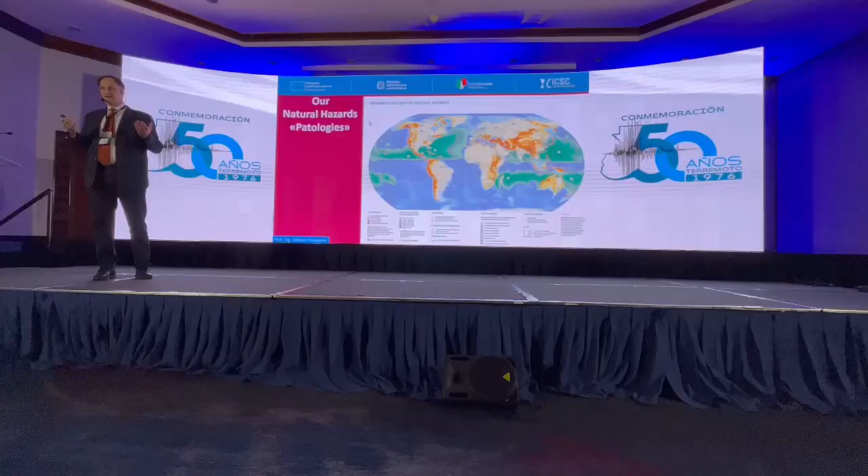No formulas. The point is, remind everyone that we have a number of pathologies. And it's important to communicate to the public using the medical engineering metaphor, the comparison. We, as a medical doctor, need to understand the problem, the pathologies.

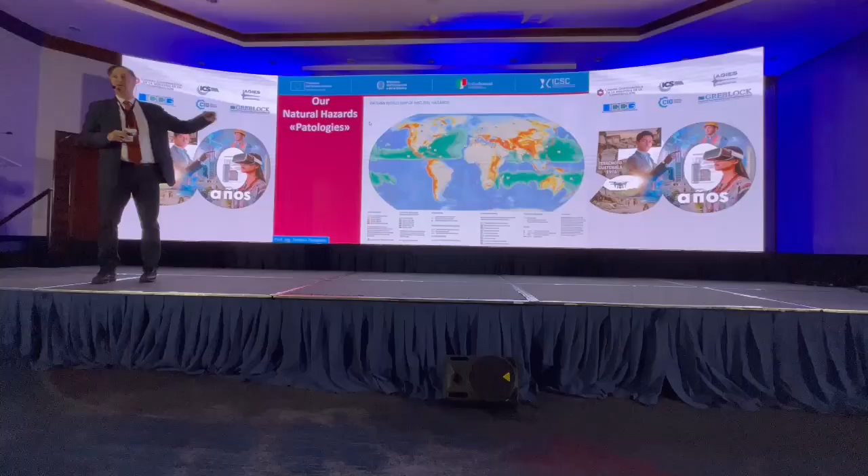You are in one of the regions where basically you have everything: volcanoes, earthquakes, floods, cyclones. In Italy we have volcanoes, earthquakes, floods, cyclones. We don't have a lot of cyclones, but we are getting quite severe weather conditions. So what are we doing with these pathologies?

Well, we have to understand that, as already mentioned, in modern societies in 2025, obviously we need to save lives, but it's not enough. The experience that we had in the latest earthquakes is that saving life is absolutely fundamental, but it's not sufficient. Because saving lives under major disaster will, on one hand, be the primary goal, but on the other, will not give to the society what we call resilience.

In a nutshell, I went through the earthquake in New Zealand. I was a technical person, I was a father. And the worst case scenario is when you know what's happening and you can't do anything about it. So you're entering a building in an aftershock and you don't know if you're getting out of that. And people saying, why are you doing that? Because that's our job. But you have kids. Yeah, but that's my job.

So once you go through an earthquake and you survive, as I was lucky to, then your brain is changing. And your brain is changing so much that you don't want anymore to talk to engineers only, architects only, constructors only, but you want to talk to the politicians. You want to talk to the decision makers. So, hands up, how many of you are engineers?

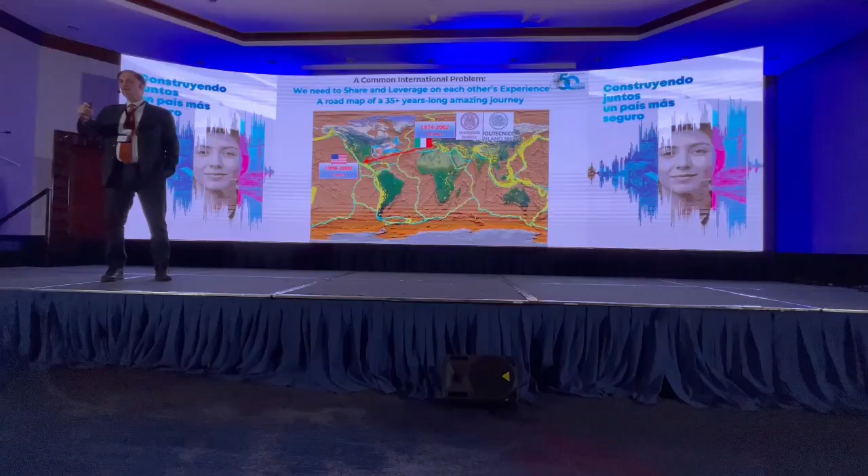Pavia University, working with the Leaning Tower of Pisa, with Professor Magenes, working on masonry, working on concrete, Technical University of Milan, then flying to San Diego, where I met Nigel Priestley, who became my co-supervisor. Thank you to Professor Rolando Torres from Guatemala University, where are you? Because he gave a fantastic history of Park and Paulay and Priestley and Housner and so forth, and Bill Robinson and Ivan Skinner and James Kelly, and the more you know.

So I learned my roles over there, and I will share that experience of what I learned. Then we come back to Italy for another couple of years, and we are actually implementing things that we've been learning from Italy and then from San Diego.

They're not happy because you want to travel the world. I ended up for 3 months for a visiting experience, a visiting lecturer in University of Canterbury, New Zealand, the Park and Paulay and Priestley, the land in the middle of Down Under, where they developed the capacity design. So weak columns becoming strong columns, and the beams becoming weak beams. So you want to have the damage where you think it's supposed to be.

And I spent 16 years over there. The 3 months became 16. Then I came back. Came back doing what? Came back to the capital of Italy, Rome, with the expectation that if you're in the capital, you will be able to speak to the decision makers, the ones that are going to make a change.

No, you need to chase them. They're not coming to you. Why they should be coming to you? Because in New Zealand, the politicians were coming to university to learn what was happening, to prepare laws to make it happen. So another world.

So I thought that Italy had developed the same culture in the meantime. Not exactly. So all of this, if you sum them up, is actually more than my age.

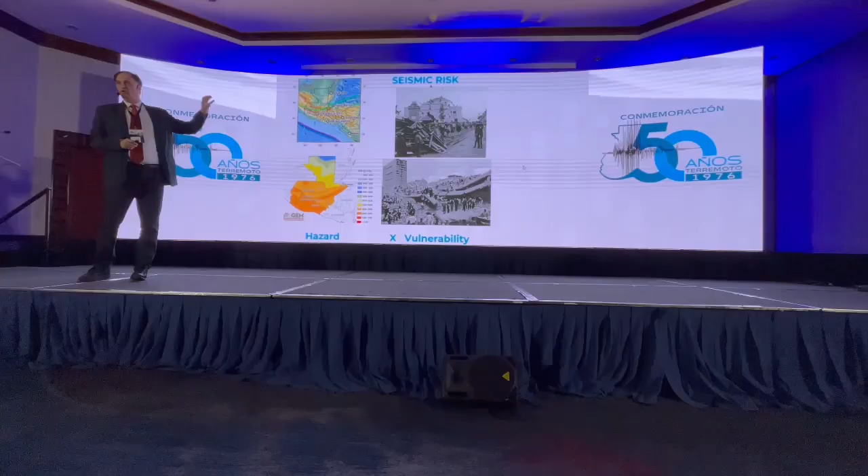It's nothing new. But it's not because Guatemala people were doing wrongly the design. It's because the knowledge 50 years ago, 70 years ago, 100 years ago was equally bad everywhere around the world. So the type of old buildings everywhere around the world were collapsing and would collapse if we do nothing, because that's what human beings knew how to construct.

Exposure has been mentioned. What does it mean, exposure? If the building collapses and there's no one inside, you're destroying the building, dot. But in reality, you're potentially killing people, you're potentially killing the production, so the contents, and you're potentially destroying the culture. So if you want to put money...

Often it's difficult to put money on the culture, although you understand it is very precious. If you want to put money, you will understand that production is important, but typically the idea is it's a private issue. Production is private.

So I will let the private company make an insurance. If the production is not working, I, a normal citizen, will pay more money. Your salary is not increasing, so you will be suffering the consequence of an earthquake far away in your same country because the whole country is becoming poorer.

Okay, what is the seismic risk profile of Guatemala? How many people know about that? Hands up.

Imagine you are in the construction environment. Your friends, when you go for an aperitif on Friday or Saturday evening, they would not know, they would not even care. Actually, they don't like to speak about bad things. So let's try to speak about good things.

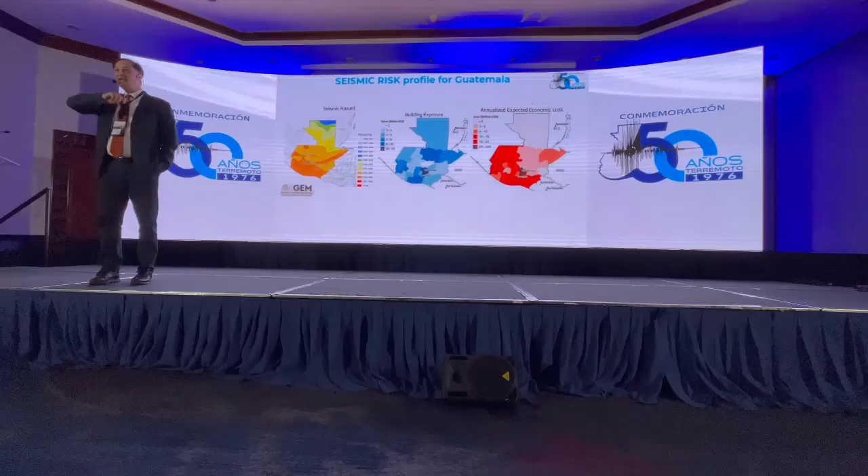Do you have an energy bill? Every month you're spending for energy? We are having a seismic bill, that's how I call it, that we, all together, citizens of the same country, are paying without knowing. If you knew how many millions of US dollars every year, by doing what? Nothing. You're doing nothing. There's a leakage of your money. By doing nothing, you're keeping spending money. Did you know about that? No. Why? Because no one explained that on television.

You need to be fair enough before the most important sports show that you have, explain, these are the civil protection uniforms, aren't they? You are from the civil protection? Voi siete della protezione civile? Gracias, muchas gracias por being here.

So the idea is that if we knew, and we told the citizens, that you're spending a lot of money, which is the reason your salary is so low and not increasing, by doing nothing, then I would say, listen, how much does it cost to spend less? It's called therapy. If you tell me how much it costs, depending on how much I can invest, I will try to reduce the annual seismic bill in Guatemala, in Italy, in New Zealand. But I need to show people, otherwise they will not understand what we're doing.

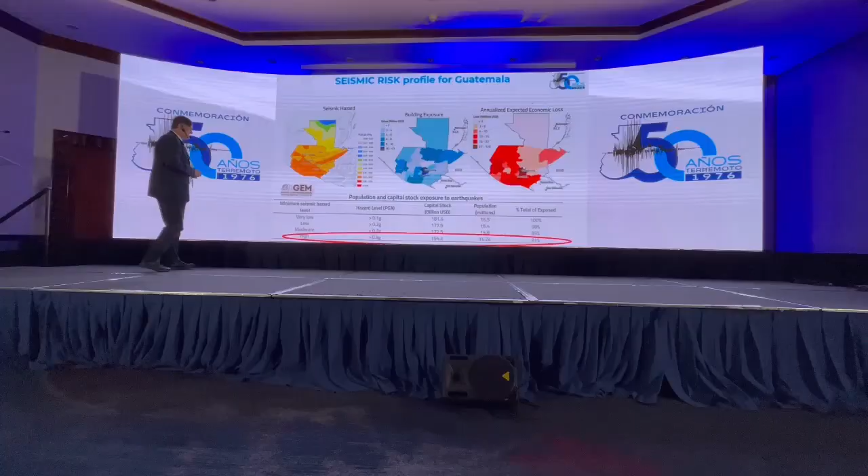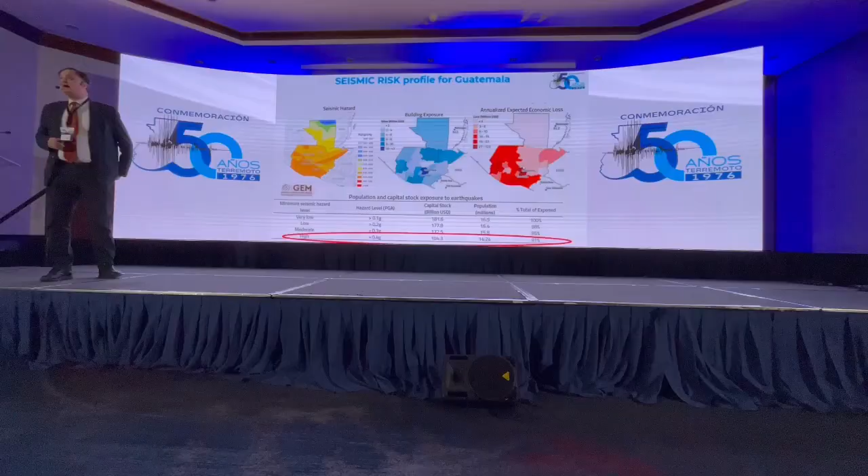Just look at the numbers. Hazard level, capital stock, population: 14 million people, 90% of the population in Guatemala is in a high seismic region. 90% of the building stock is affected, socially and economically, by whatever will happen. What about the other 10%? They will be affected too, because if Guatemala City gets in trouble, the whole country will get in trouble because of the numbers.

Okay, so let me open up a big question. How do codes design buildings? New. Today I designed a new building, and it was already mentioned by a speaker, so I'm very pleased that we are integrating. How is a newly designed building performing? We go to New Zealand.

We go to New Zealand where we had a reality check. It's called the Shaky Islands. We are really in a very high seismic region. The city of Christchurch, where the University of Canterbury is, had a peak ground acceleration, the intensity of the 'flu' so to speak, not too high, 0.22, written in the code.

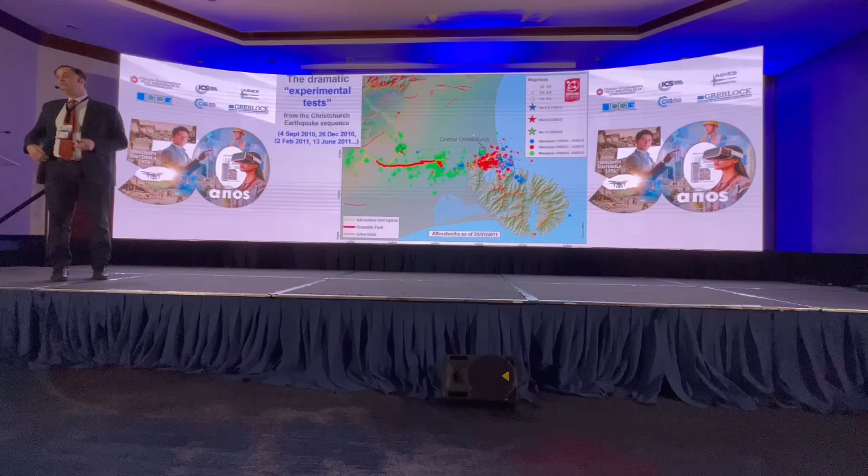So what we got in New Zealand has been a breakthrough in the understanding of earthquake risk, because it's a very well-developed country, a country with awareness, a country with good construction. It's a recent country, you don't have buildings thousands of years old like in Italy, you have buildings 150 years old. So relatively new construction, well designed, well aware of people.

A sequence of 2 years of aftershocks, and the city falls. There is a documentary on the internet called When a City Falls. These are not clouds, it's actually the debris of an explosion within the central business district. You didn't know. You heard about it, but you didn't really know. That was my city, I was living there with 2 young kids.

So we started looking at what we unfortunately have to expect, even in New Zealand, where capacity design was developed, where big columns and small beams to create a plastic hinge in the beams were developed. Prior to the invention of capacity design, the buildings are equally vulnerable.

Look at those buildings, small columns and big beams. How is the small columns, big beams going to fall? You don't need to be an engineer, an architect, a

geologist, a contractor, or an insurer, you can be a kid. You show a kid at school, what is this type of palafitta? I don't know if palafitta is understandable. Palafitta, how is a palafitta failing? I'm asking primary school kids, and the best answer I got is, as a palafitta, so of course it's going to break the legs.

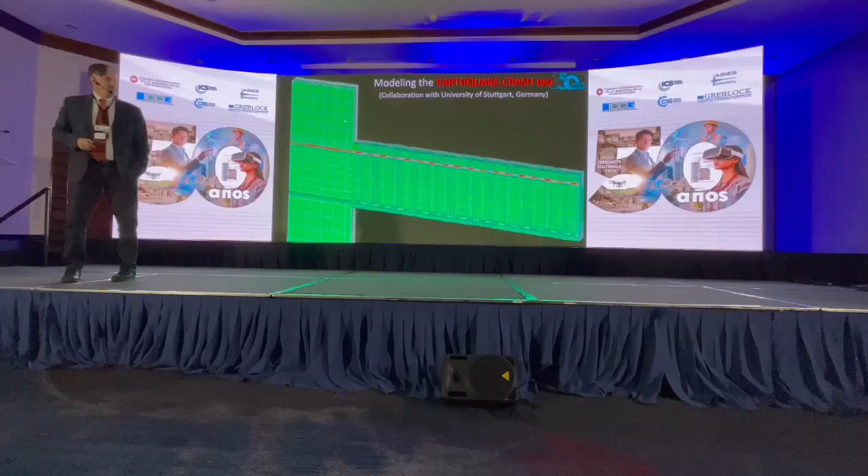And the Parliament and Senator people said, we didn't know. Now that you do know, what are you going to do about that? I'm expecting tonight on television, after the TG1 news, I'm going to expect you to say, oops, we didn't know, but now that we do know, repairing this building is extremely expensive, but we know how to model it. So from a scientific point of view, wow, look at that fence, isn't it?

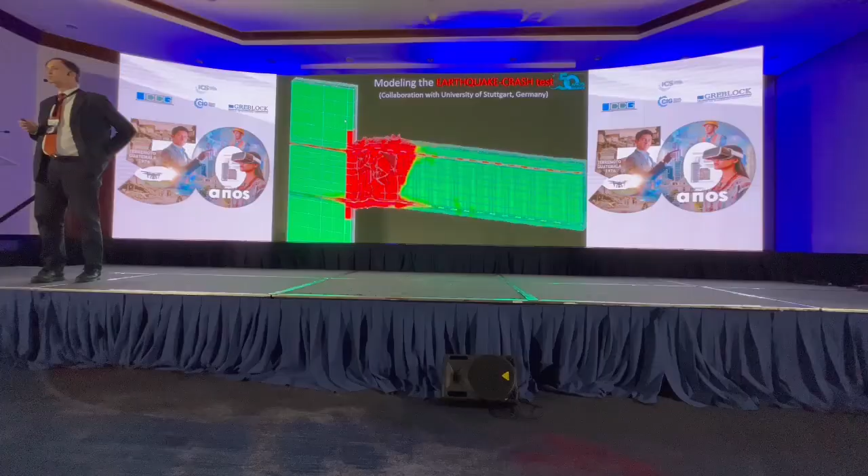This is called a digital twin. We were doing numerical modeling since ages, there was no need to call it digital twin. But digital twin is cool, it's fashionable, right? So this is a digital twin of your building.

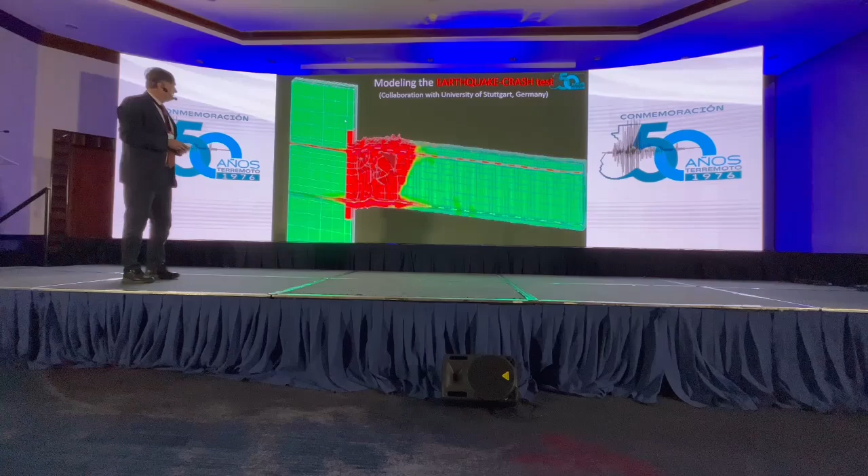This is exactly what is going to happen into your beautiful living room. So you're in the living room, and there's going to be something like that. And as a consequence, we actually don't really know how to repair it. And half of 1,800 buildings in the central business district in New Zealand were demolished.

Because repairing those buildings is a disaster, it's very expensive. But while you're demolishing it, you're saying, but these are by code, this is new design by code. So there's something that we have been missing. The consequence of that, we do it again. Just point your eyes to 2 or 3 buildings, look at them, fix them, okay?

Fantastic, I didn't know about that. So now that I know, I will start thinking about it, because in addition to 185 fatalities, the cost for the country was 40 billion New Zealand dollars - let's say 1-to-1 with the US dollar in terms of purchasing value. So the exchange rate is different, but basically it's like having 40 billion US dollars.

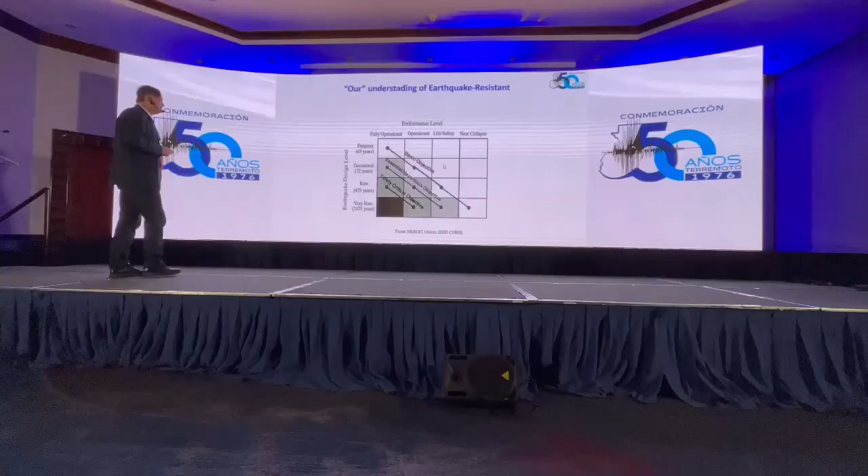So how can we rebuild a safer and resilient community? What happened in Christchurch is that after the earthquake, we started explaining to people the basics, as we already know - unfortunately, we already know. So we go back to the Vision 2000.

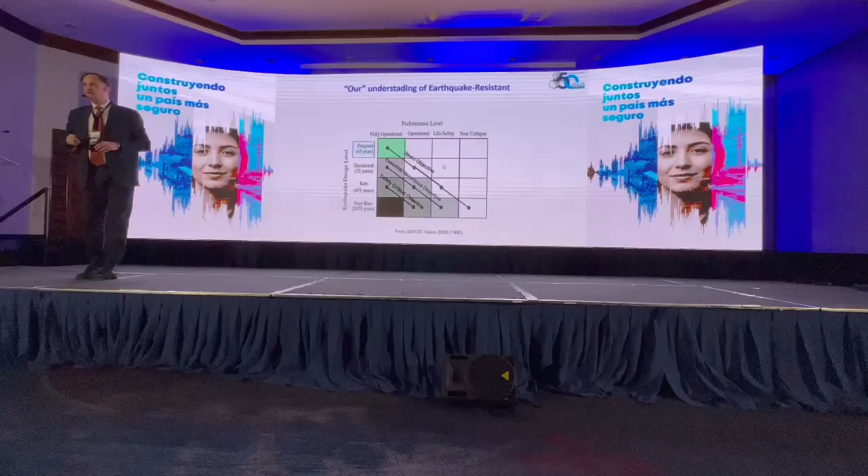You already have seen these matrices. You know that this is everywhere in the world: we are designing for small earthquake, small damage. Yellow, bigger earthquake, bigger damage. Orange, life safety - bigger earthquake by design, bigger damage.

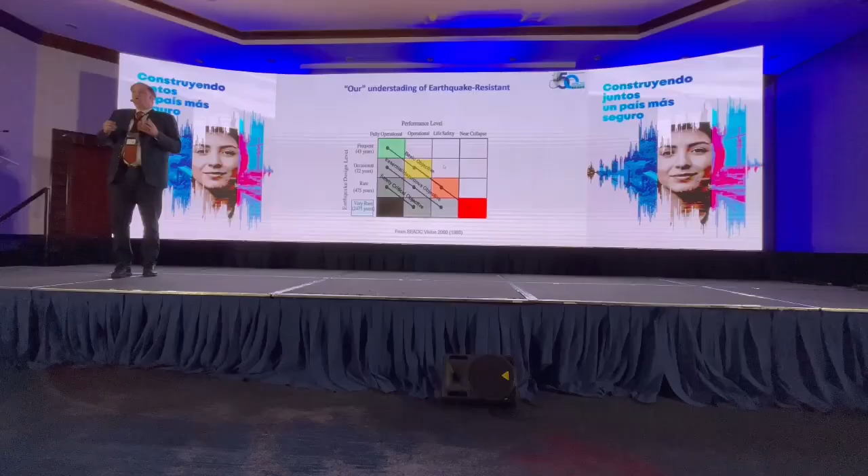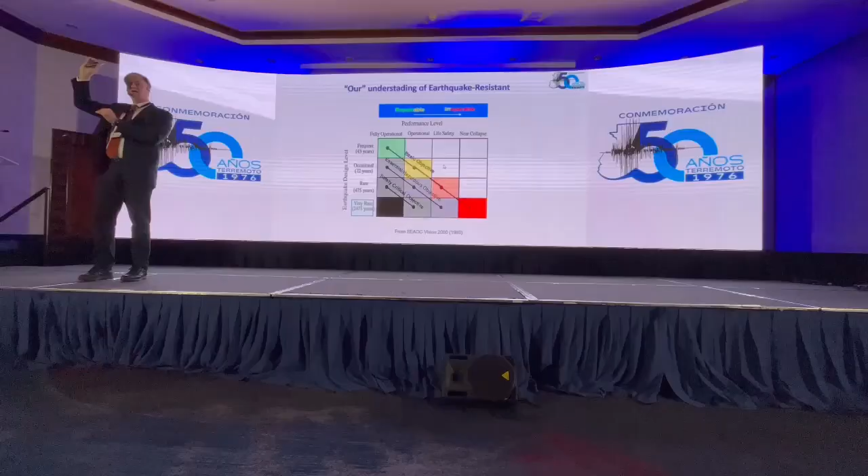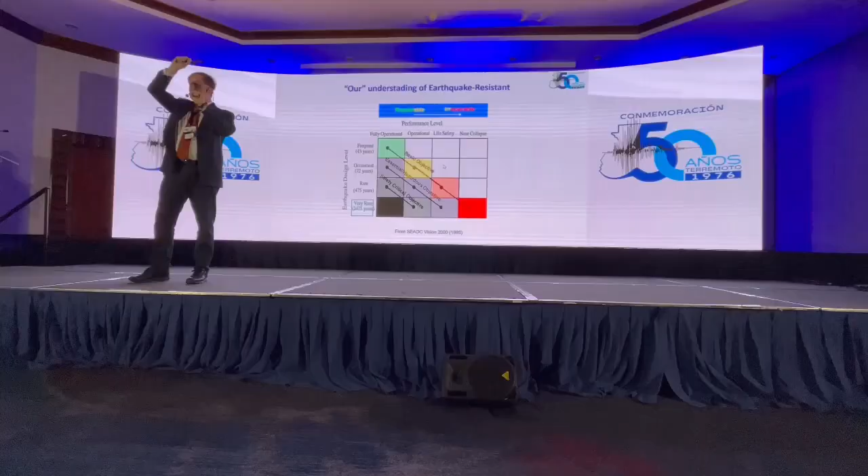So what are the colors that I added? The colors are what I added to explain to the New Zealand population what the consequence was. Those colors are called a tag. After you get an inspection of the building, you get a tag, you get a paper - you are allowed in, you're not allowed in, or absolutely you cannot touch this building, you have to demolish it. So people were very much understanding.

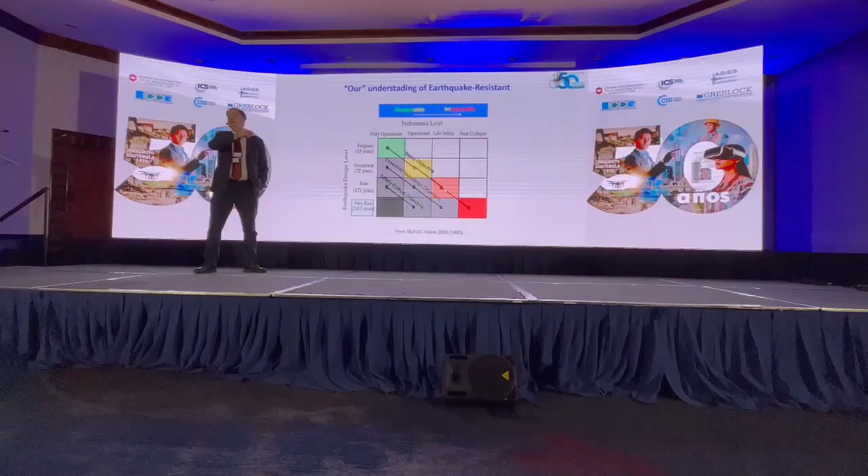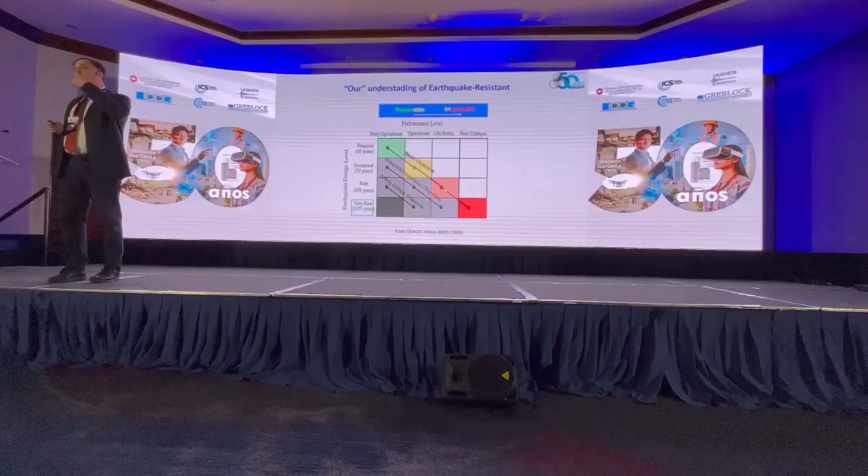And what are we designing for? We are designing for here, which is exactly what we saw - we are designing for life safety, the consequence of which we did not understand. We didn't know. After the Christchurch earthquake, which is now 15 years ago, we know that a full city will be destroyed because you're not able to repair it.

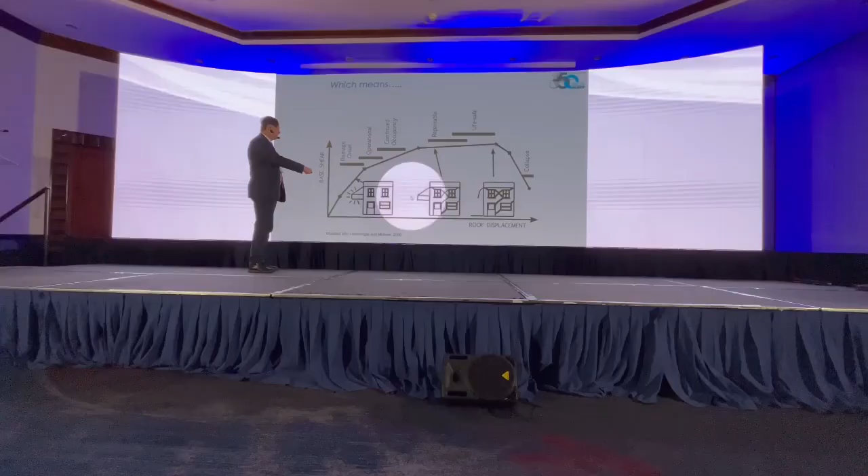And you know that. So imagine, I'm looking at the civil protection people - tonight you're going to talk to your friends, they should not be technical people, your friends. And you're going to say, I'm designing an anti-seismic building, an earthquake-resistant building. They would be thinking it's this one here, possibly in between here. They would never guess that your building is that one. They would never guess. But as soon as you mention that it's like a car, they will understand it.

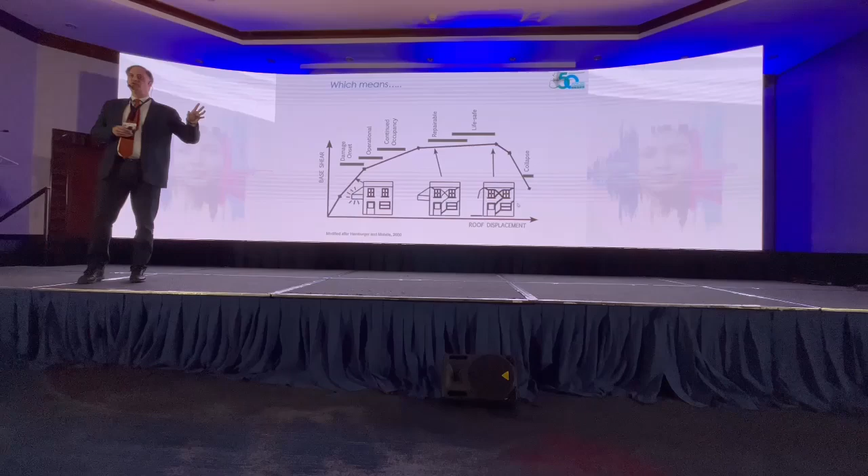It's a major difference. In a car, you get a crash test, you get an accident, you're going to have a new car in a few days. In a building, you're not going to have a new city for everyone for decades. So the impact is completely different. So let's make an example with a car, but let's remember it's different. Okay, so I'll go fast.

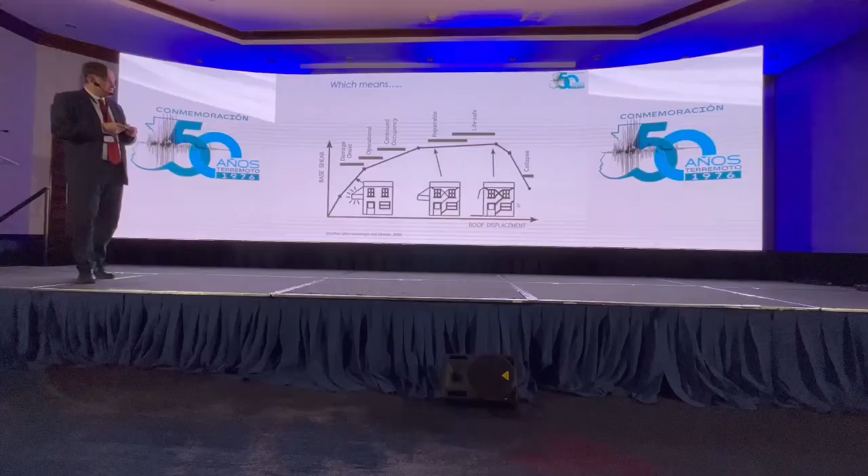The code is not meant to be the target. The code is meant to be a minimum by law. Yesterday we were exchanging some concepts, and I was saying that I tend to be very direct when I'm teaching. So to my engineering students, I say that the code, minimum by law, is what allows you not to go to jail. If you cannot go below that, it's minimum.

So if you do the minimum by law, are you doing good design? No, you're simply protected from going to jail. But why are we allowing that? Because no one really knows what we're doing. No one really cares until it happens, and then they're going to tell the engineers it was meant to be earthquake resistant. He said, yeah. And we are clarifying that earthquake resistant is not earthquake proof.

Earthquake proof for people means bulletproof. Shoot me, I'm earthquake proof. Shoot me, I will continue working the same day. People do not know that.

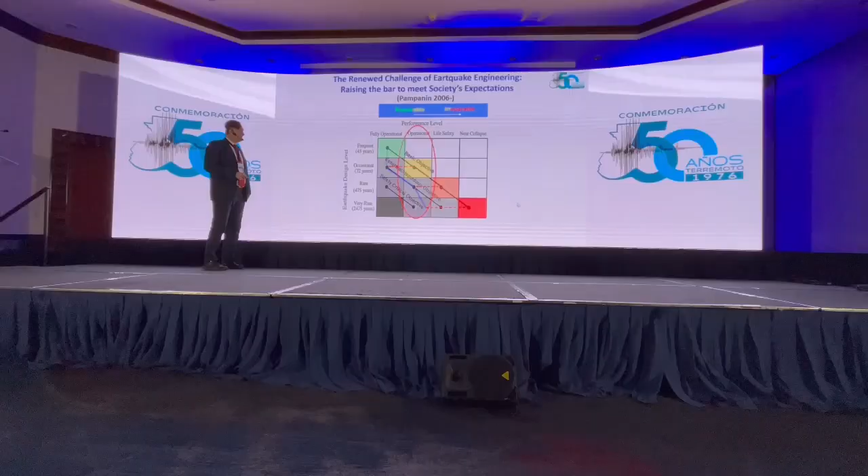As soon as you make it clear, we ask, so what should we be doing? We should simply raise the bar. We should design according to this performance approach, which means repairable. We need to make something more focused on damage control, which is repairable.

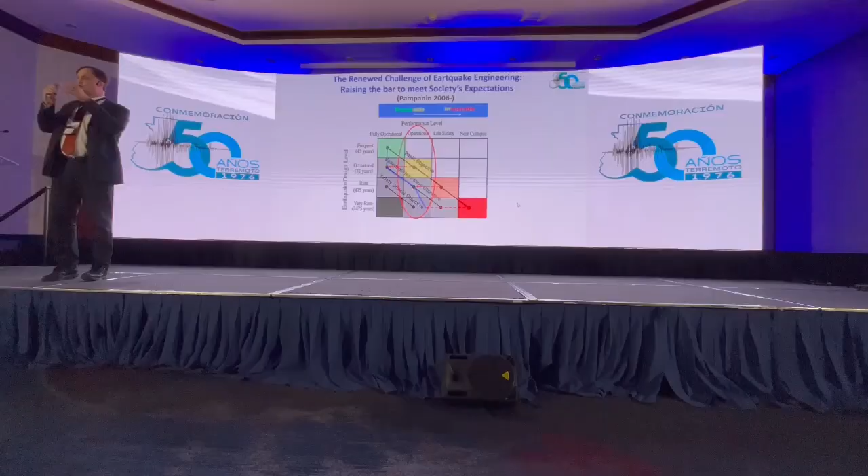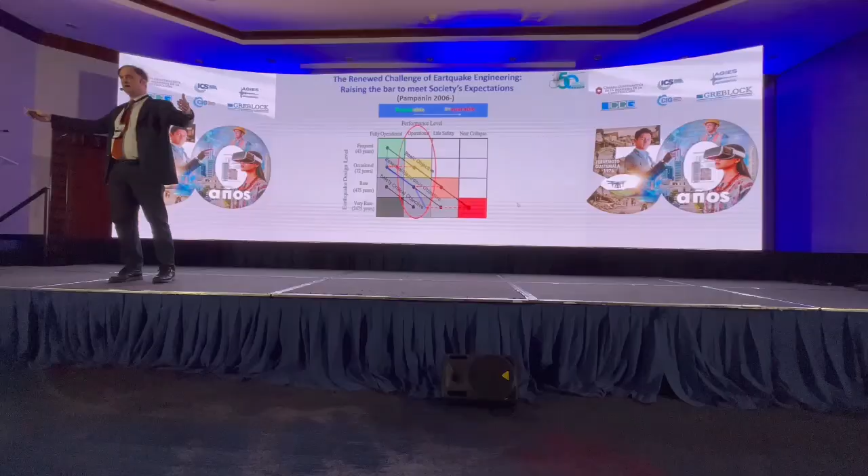How much does it take? You can design a bunker, a huge 1.5 meter thick wall for a nuclear bunker as your house, but it's going to be too expensive. Or you can change technology.

So there you are. These are supposed to be, as I see, the minimum by law in any country which is claiming to be not underdeveloped, you see what I mean. If you're not underdeveloped, then you need to either use base isolation, supplemental damping, bracing systems, dissipative devices, or let's check that out. That's what I want to talk to you about, because I assume you know about base isolation. So rocking is a sort of internal isolation. Where does it come from?

Fast and quick, thank you very much to, where is Rolando Torres. I'm going to show you the minimum by law in any country which claims to be developed. How many of you know about this? Just raise your hand. 1, 2, 3, 4, 5.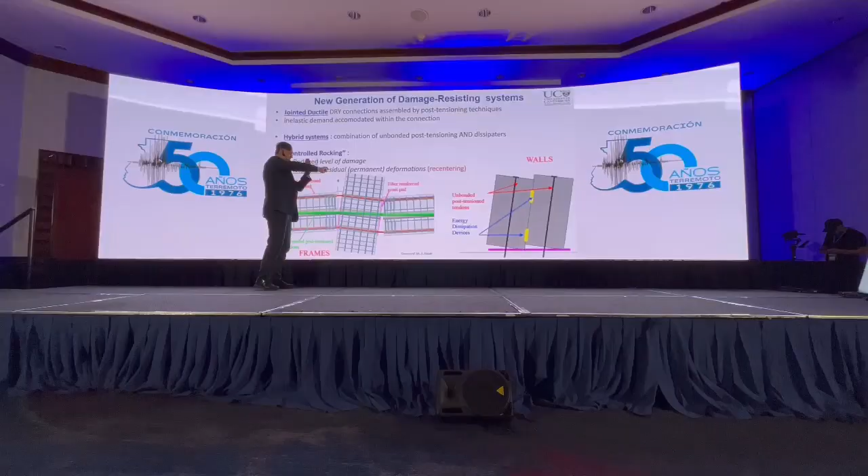And without going into the detailing, look at this, it was a monster test, the biggest large-scale test done in the United States at that time, 1999. So what is the idea? A Greek temple, rocking, being helped by a string, by an elastic rubber. It's not rubber, it's post-tensioning.

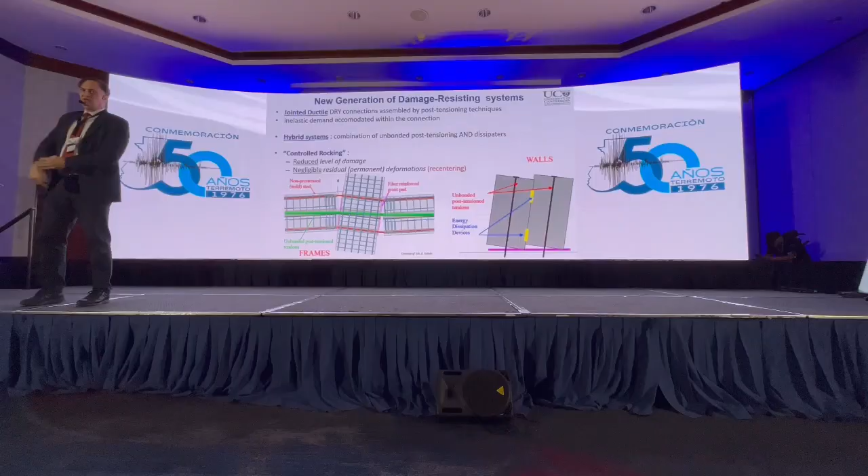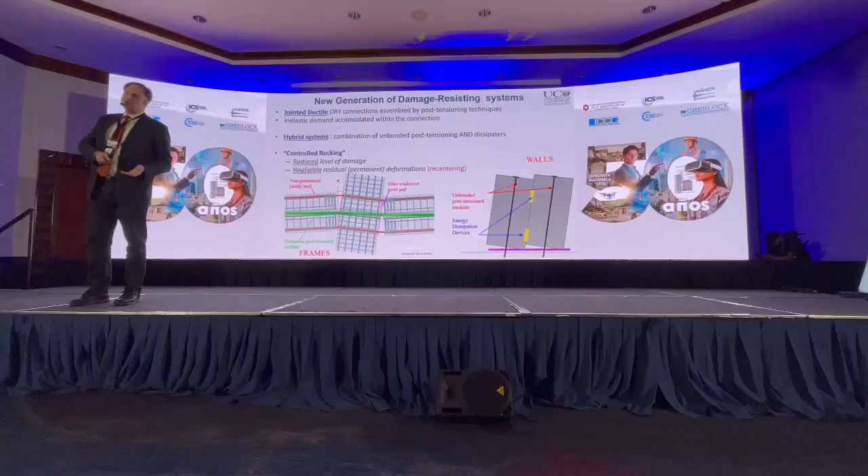So you have the Greek temple supported by, that's why we call it controlled rocking. Anyone who thinks to be competent, not in engineering only but in construction, can learn the basics. You need to learn something, the basics, to make this happen.

So you're going to find that there's a very young myself, Nigel Priestley, Sri Sritharan, and so forth. It was a big experimental test. And here I put this because there's now a video you can see on the news, sorry, on YouTube. So this link is for you to understand, but I'd like to present, there was a marvelous team.

Nigel Priestley, John Stanton from University of Washington, Seattle, Susan Nakaki, she was a designer in Los Angeles. Sri Sritharan, postdoc, associate professor, now full professor in Iowa. Christopher Latham, a PhD, a technician in the lab. He was the first student to complete a PhD degree with Frieder Seible. So the lab in San Diego had a technician with a PhD degree. Unbelievable. This young Italian who was climbing up, and a colleague, a master student.

Jim Collin. So beam, columns, walls, rocking, post-tensioning, you can do it tomorrow. So the challenge that we are having, and now I'm involving the architects, leader of the Cement and Concrete Association of Guatemala, we said it's going to happen because it's just a matter of developing new things. You can do it even using cast-in-situ concrete.

It's not as powerful, but it can be done. I recommend you go and buy this book. It's a commemoration of Nigel Priestley by his students, and like many of us around the world, we wanted to prepare a tribute to Nigel Priestley.

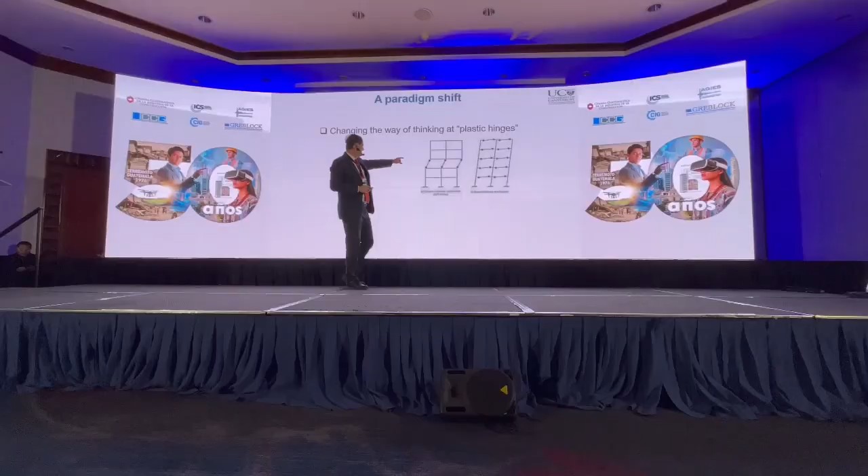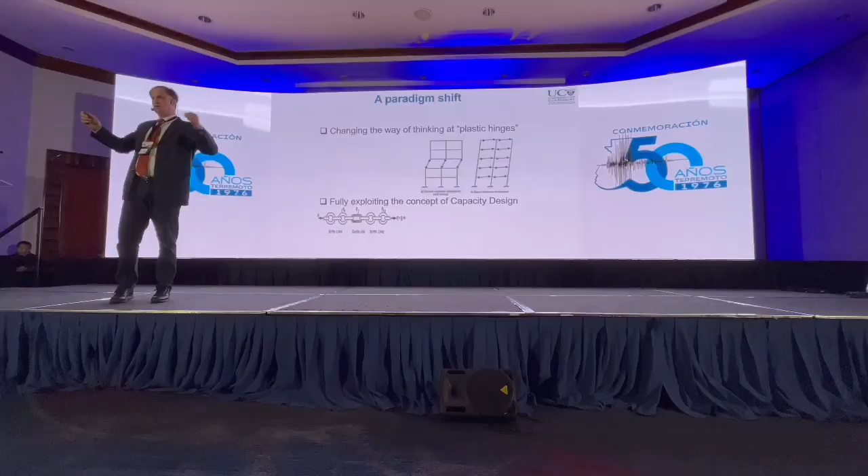So what is the new way of earthquake engineering? In the 1960s, the big breakthrough was not to have soft story anymore, but allowing the building to survive, to protect people, by making the columns, the legs, bigger. That was capacity design - the famous theory of the chain, Tom Paulay's theory. The weakest link of the chain is going to be the strength of the chain. If you make the weakest link ductile, you're going to have a ductile chain. But the ductility was coming with damage.

Now we're saying that ductility is not anymore equal to damage, because you have a different technology allowing you to be ductile without giving the same level of damage.

These are my students in New Zealand. We were doing laboratory teaching where they were constructing pre-70 beam column joints, pre-70 detailing, no stirrups in the joint - it's going to fail and kill. New code plastic hinge, and the students were constructing them to understand what was going on and testing.

And the new generation - we are in 2006 - an engineering student learning the ropes at university was never going to go back to that thing. He was saying, but that's easy. I can understand it, I can control it. By hand, in half a page, I can design it. So why should I use the old version?

We moved one step up - repairability of the link. And you might not know it, but we moved the bars outside. You see that the outside bar has a fuse. It's the seismic fuse. What is the seismic fuse?

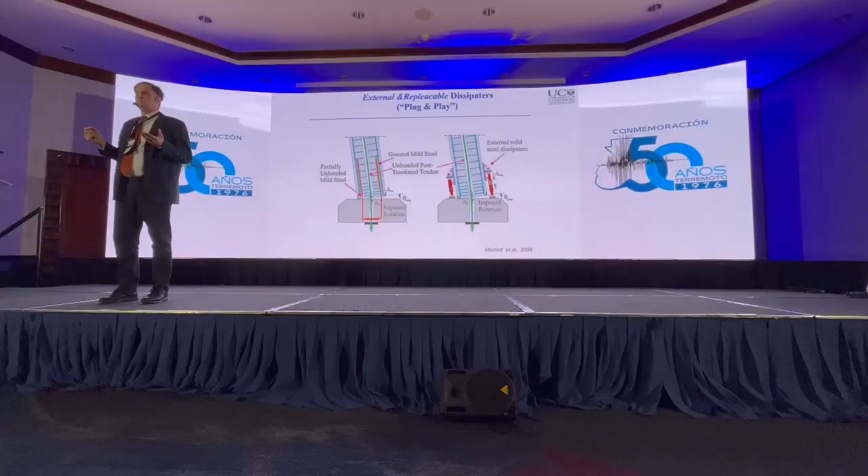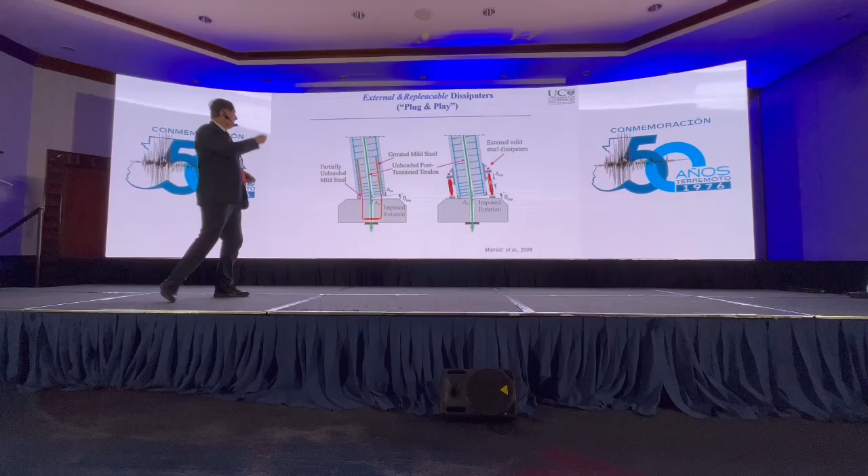You will be asked by your friends. It's the same thing as an electrical fuse. During a sparking electrical power, you're going to have some sacrificial elements, which is exactly what these guys are - these are sacrificial elements. I call them plug and play.

And the reason I'm extremely honored - it comes to my mind in a tiny way - and pleased to be able to speak to you, is because I decided to remain a poor academic. If I was patenting this solution, which I did not want to, I would not be here speaking with you. I would have 3 or 4 Greek islands which I would have bought with the patents, selling the patents. But I decided to leave it for free.

So, friends, colleagues, people, 15 euros. Why 15 euros? Because I didn't patent it. It's a piece of steel, fused down. I'll give you all the tricks of how to detail it.

One condition: my name is Stefano, your name is Ian - we have been given our name by our parents. So please don't change the name that I gave to this little technical device. Some people will say, why should I? Because commercially there are some people who are a little bit strange in the world who did it - just changed the name, pretending that they invented it, and this is extremely bad, extremely bad.

Where is Orlando? Orlando, next time you're making the slides: Priestley 1999 is low damage, Pampanin 2000-something, plug and play - but I don't care if it's Pampanin, plug and play, whatever, who cares about who did it, okay? The name is going to be respected.

So what does it look like? Really, we are playing with that - you can mill a reinforcing bar, then you're putting the bar into a tube, and you're grouting or putting epoxy, so you're able to go back and forth without breaking it. And that's an experiment, and that's a test.

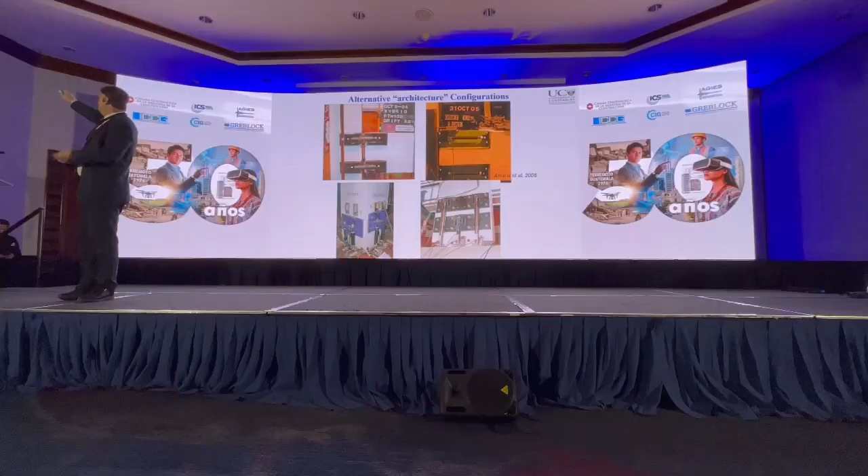Which type of new device do you have? You are at dinner with your friends and they are looking at their big column connection and they're saying, how did you get it? You know, it's the new PRESSS, iPhone 5.4, viscous damper, plug and play. How did you get it? I have good friends in Japan.

So it's not a joke. We said that to architects in New Zealand, they love it. The idea of expressing all of this, I will show you.

After an earthquake, you don't need to be an earthquake engineer to change this plug and play, like after whatever, you don't need to be an electrical engineer to go to the supermarket and change the light bulb. So in New Zealand they started talking about it. I'm Stefano, with the F, not Esteban. But the English would call it Stephano, PH. So Stefano will open a new shop, a seismic shop, located in the supermarket nearby the electrical plugs, and you're going to do the plug and play. So you're going to basically remove it and rechange it as you go.

Okay, fast and quick. You're going to say, can we design it? Of course, yes. FIB recommendation, 25 years ago, New Zealand Code, 2006. Bob Park and Paulay wanted to have that in the code, so I wrote with his help all the prescriptions, and then we prepared a design example because practicing engineers wanted to have an idea of how to do it.

How tall can you go? 39-story building in San Francisco. How's that? San Francisco, high seismic region.

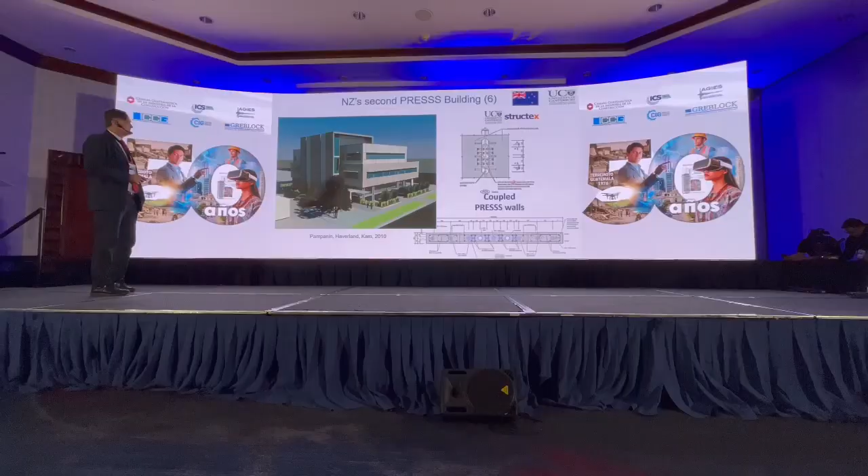It goes to different places, you can read about that in many magazines around the world talking about this. How does it work? Then we designed a hospital, which is not exactly a hospital, it's an endoscopy building in Christchurch.

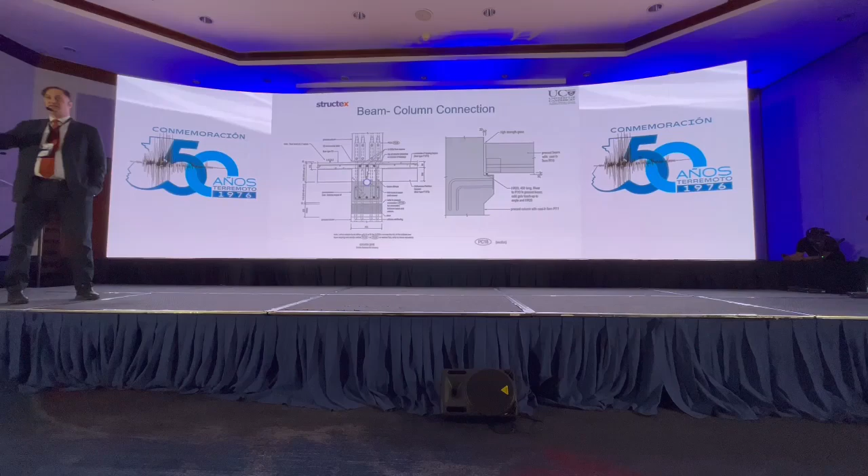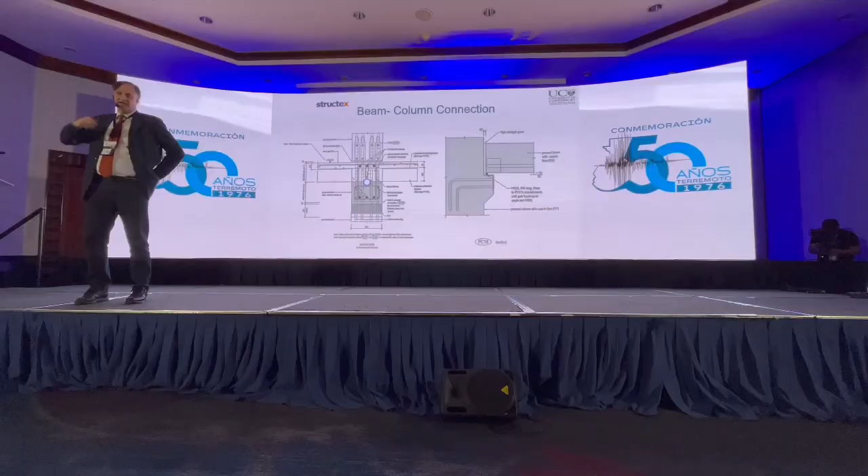I have a problem. Being an academic, I publish detailing, and people ask why I'm sharing my tricks. Because if I were commercially savvy, I would not be an academic. But since I am, I show all the tricks, so please take them for free and use them.

This is something you're doing. What is the difference? You just need a duct and post-tensioning. This building went through the earthquake in Christchurch and came out unscathed.

It went on the news. People were asking what this was, saying it should have cost a lot of money. So they came to interview me and others because they wanted to know how much it cost. I told them we saved a lot of money, but I had a confidentiality agreement, so I could not say how much we saved. Anyway, through television, people knew there was something different they could do.

More buildings followed, like the one we did in Rotorua, a police station. Look at this, it's beautiful. It's an importance level 4 police station, but they really wanted to see the dissipators. The architects in the corridor wanted to have many dissipators.

They said, listen, there's no need to have 7 or 5, we can use 2. But I like these dissipators, I was really joking. But do you think someone going to prison would be very interested to see your dissipators over there? Still, it was becoming fashion.

Vision 2050 of Christchurch. We started rebuilding Christchurch with all low damage technology, with humongous press and media communication about quake resistant design. You can do this in timber too, laminated timber. We developed and patented it, and again this is now allowed to be used. Post-tensioned timber, called Pres-Lam.

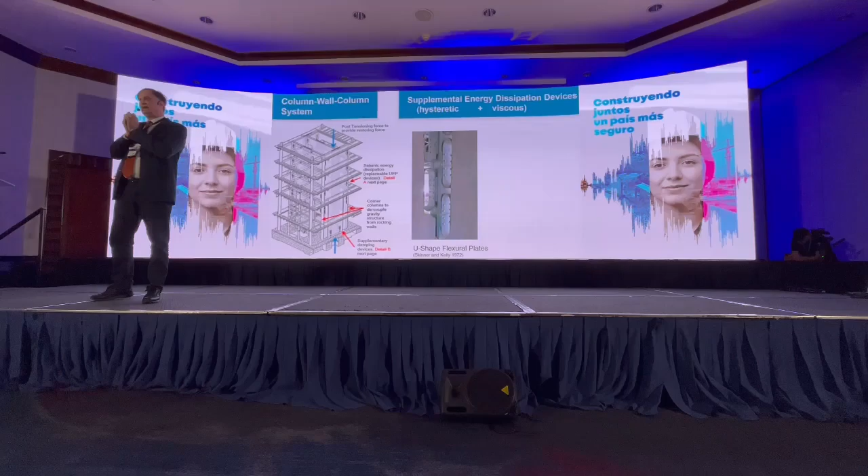James Kelly, Professor Kelly from Berkeley, took a boat and went to New Zealand for a sabbatical. He worked together with Ivan Skinner, who invented the U-shaped flexural plate. They worked together and wrote a publication together.

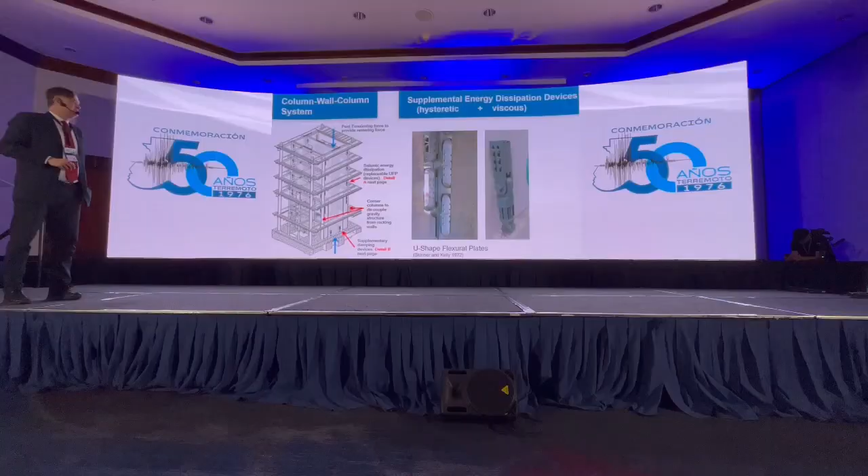So there's been a lot of important communication between the two countries. Let's look at what it looks like. The idea at the end was to have a single prefabricated element on site, tilted up, and this becomes something you can use anywhere in the world. You can then splice it or whatever.

I'll go fast to finish. You can use it for tall buildings. The FIB bulletin will tell you about tall buildings, and we had a seminar on it, again all material is free, use it, go and listen to it.

My speed of voice is a bit fast, so I'm the only one you should not multiply the speed by 2 when listening to, otherwise it would be impossible to understand.

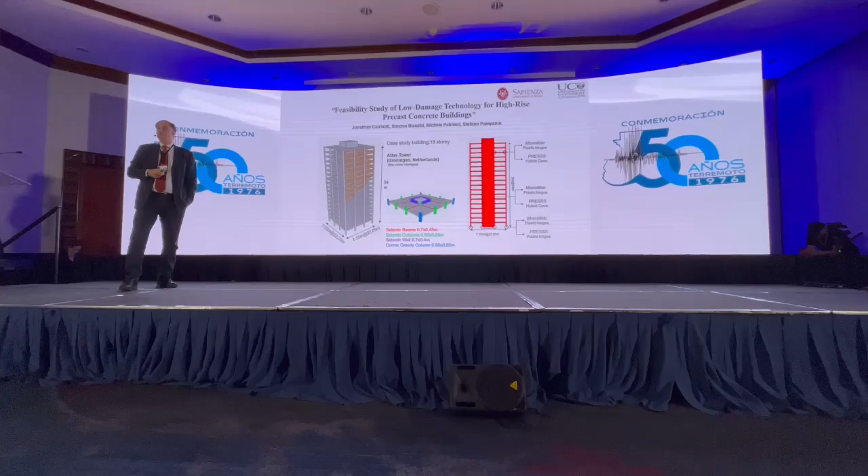But here we were talking about tall buildings. How tall? 25, 30, 35, 40, 45, 50. And the next step up, I want to address, the non-structural element, and I'm finishing because it took a lot of time. So what is the next level up that we developed and you need to know?

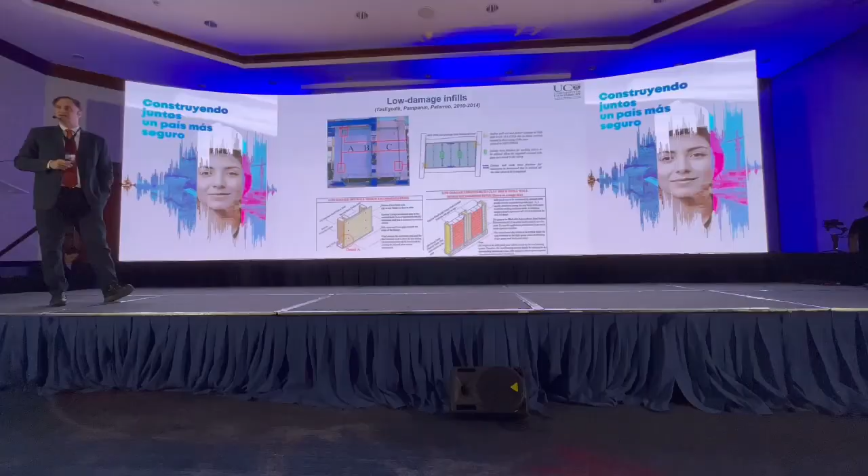Look at this, a shaking table test in New Zealand. On the skeleton, there is post-tensioning through, plug and play. So the plug and play is here.

Okay, I'm zooming in. Look at the Greek temple. The same plastic hinge, which would be forming cracks, now is summing all the cracks into one. There's nothing wrong breaking, and the plug and play are just doing their job.

So this costs nothing. Obviously there is more detailing. Here you would have a little bit of protection to the cover concrete. Why are we protecting the cover concrete?

Let me ask you, why did we ever accept cover concrete as structural engineers to be spoiled, to be pushed out? Because we did not have an alternative. Put a simple L-shaped steel bracket which will cost you €5 or less to make it happen.

So the more we go, the more we're preparing facades. These are heavy facades which typically are killing people. With a tiny detailing, they are moving like a skin around the skeleton. So a tiny detailing, and this is one example of it.

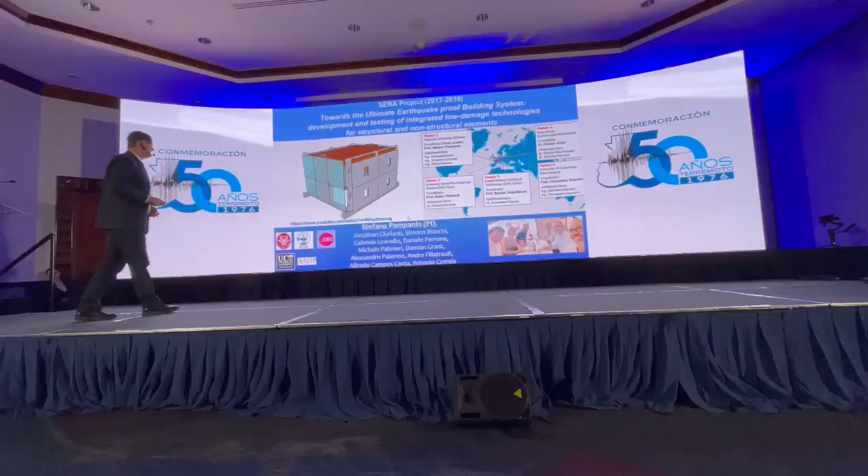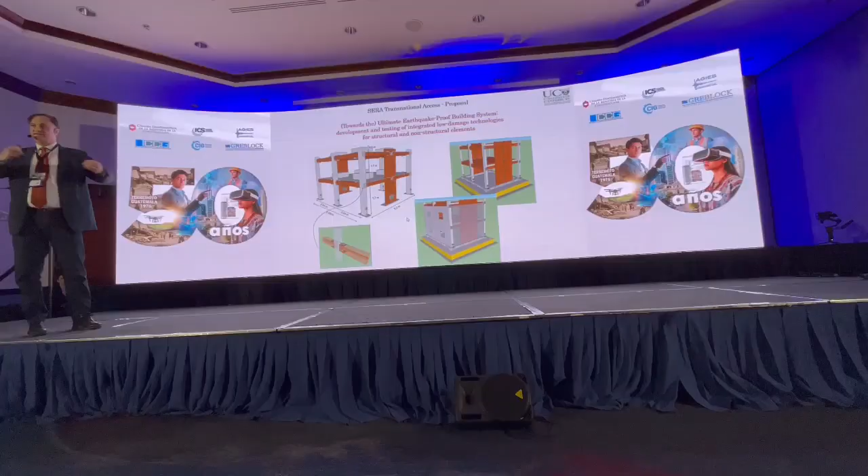And we are showing the shaking table. This earthquake is the Christchurch earthquake, which is supposed to be a collapse prevention earthquake, supposed to be taking down a new building. And just to not be happy with that, we were using the vertical acceleration from the L'Aquila 2009 earthquake. When you move a 3D shaking table in Lisbon like this, you have that option on, so I was playing with it to create a monster.

So we get, I need to click, and we're finishing. I need to click on the bottom.

So we are on this 3D shaking table with glass facades, precast concrete facades, clay brick infill, all detailed in a low damage way. So they are not standard, a tiny modification, the famous devil is in the detail. Supposed to be coming.

It's a collapse level of earthquake. There's nothing happening to the glass facade, there's nothing happening to the precast elements. If people can just slide fast on the bottom, just slide faster. Yeah, just go a little bit, yeah, thank you, there you are.

These are clay bricks, not constructed as we typically do, but constructed vertically like a gypsum rock. So with a tiny modification of detail, your house under a collapse prevention earthquake is unscathed.

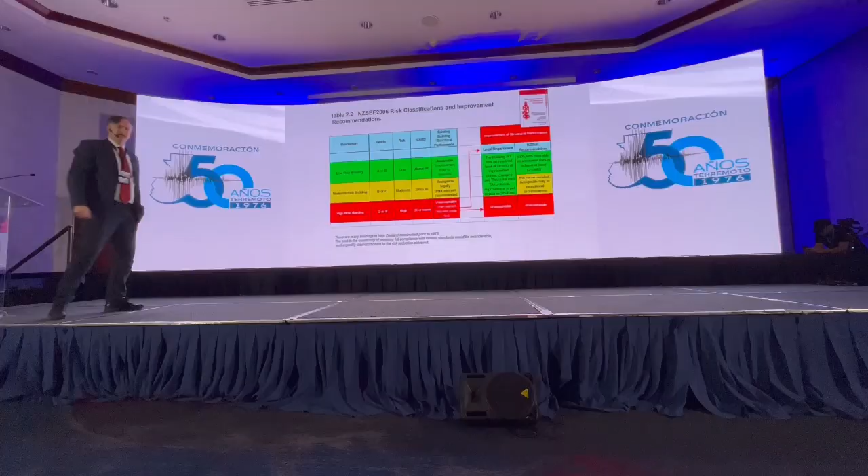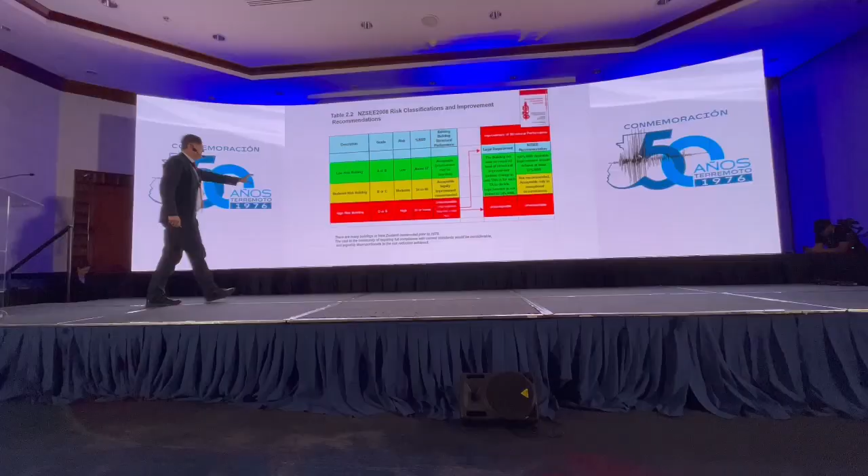So we are preparing a risk-based approach, a new code to do the assessment, and a scoring, A, B, C, D, E, like in an energy efficiency scoring. So you get a scoring of your building, and you need to raise the bar. If you are below a certain level, you need to raise the bar. This became the national plan in New Zealand, which is mandatory.

What about Italy? A disaster? So in Italy, I managed, when I was going back to Italy, to bring the knowledge of the national plan that we developed. I was the New Zealand president of the Earthquake Engineering Society. And over there, you already saw that, called Sisma Bonus.

We started introducing financial incentives. New Zealand, you do it, you're mandatorily obliged to do it, you pay. New Zealand, Anglo-Saxon. Italy, I pay as a government, but I need to give you an incentive, otherwise it's not going to happen.

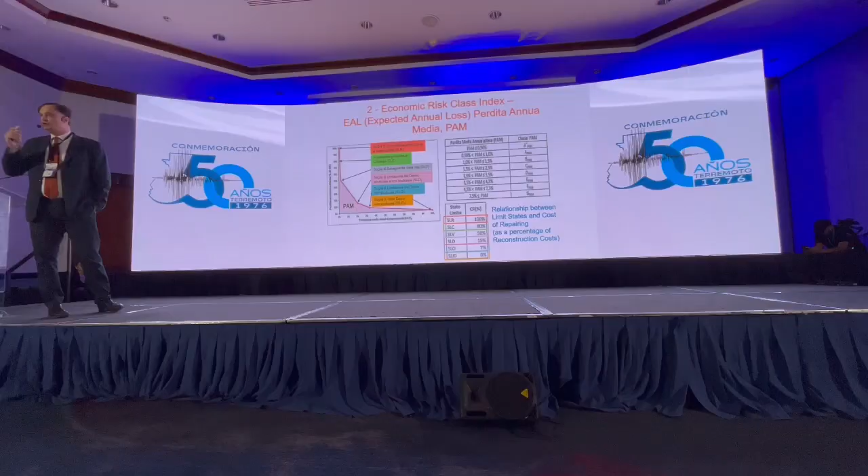So there were financial incentives, which slowly we improved by adding an economical parameter, which in our research environment is called expected annual loss, perdita annua media, is the economical cost of repairing a building, which is minimum by law designed, but is going to cost you 50% to repair the building.

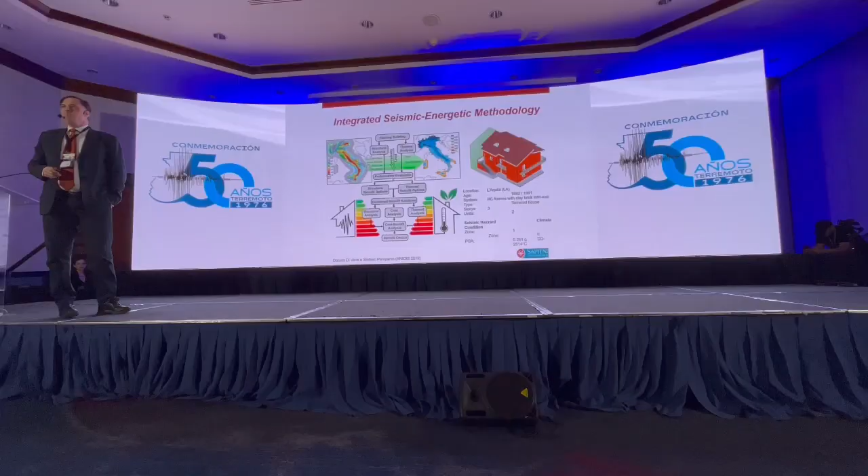So the new seismic rule is take a safety coefficient, take the economical coefficient, the lower is going to give you the class. And if you're moving up by 1 class, I'm going to give you tax rebate incentives. You can do it in different ways, but the point is that I'm thinking that that could be a winning point for Guatemala.

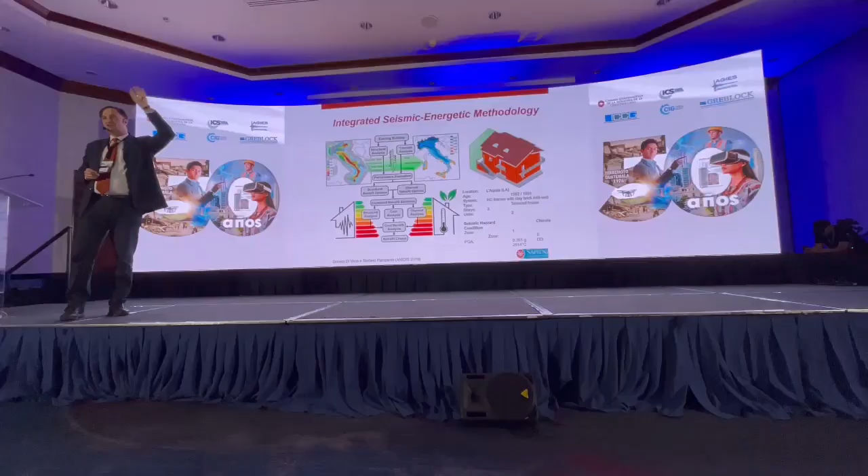Not happy, we pushed for integrating seismic and energy. Energy efficiency is becoming, with the Green Deal from Europe, a must, so you need to do energy efficiency. So, as an engineer, we will not be able to convince people to do seismic retrofitting. This will come with money from the European government.

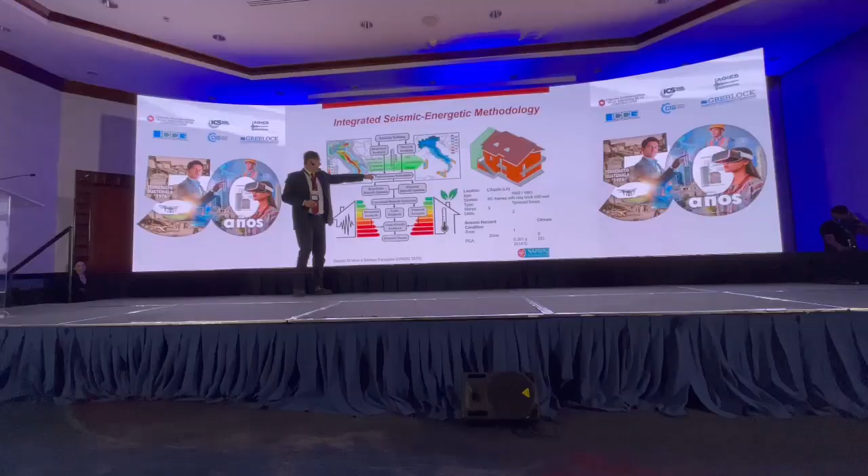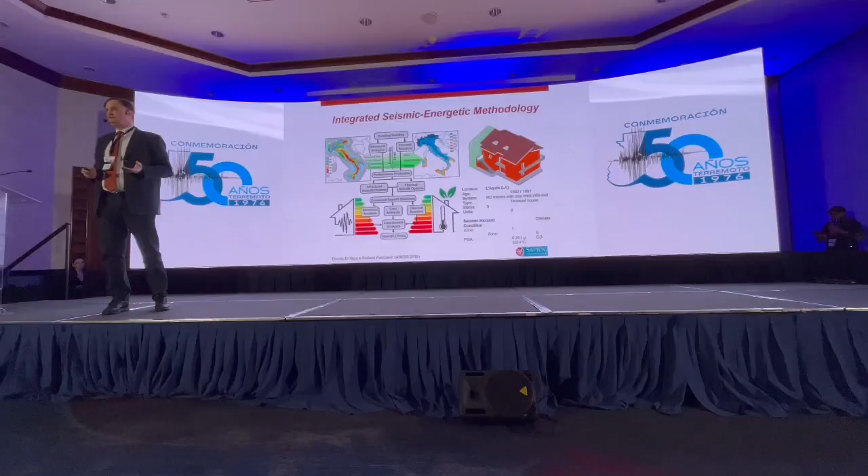So what we are trying to do is to introduce seismic retrofitting in the project of energy efficiency. So somehow we are taking advantage of it. And how we do it? Energy efficiency requires that you're working on the envelope.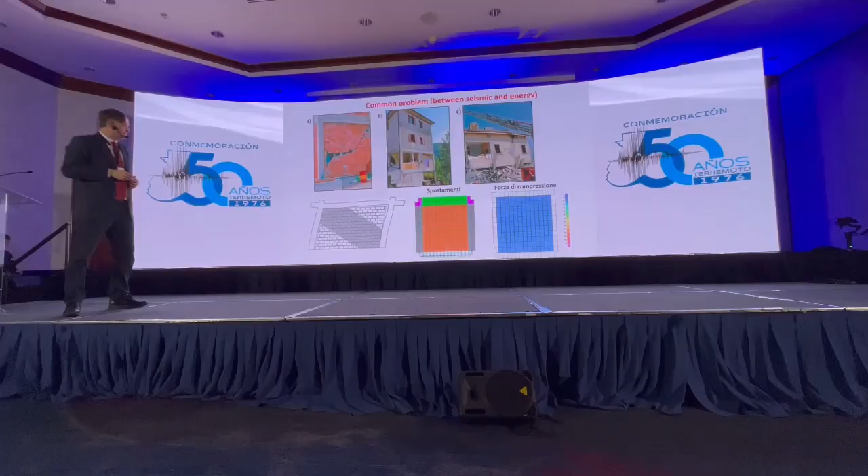But the envelope is, from our point of view, look at this one here, is exactly what we call non-structural elements. So you're going to give me your beautiful energy efficiency dress, and the earthquake is going to break it. What a not wise investment. So if you're doing protection altogether, that would be a better one.

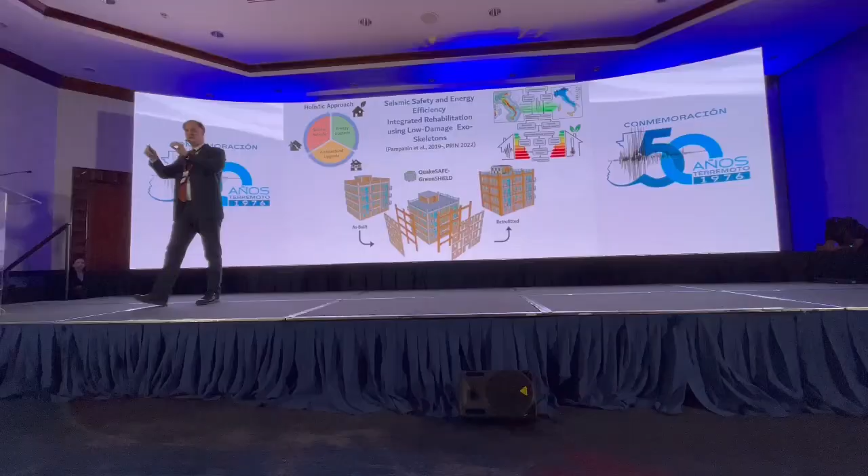So we prepare a project, a European project, and we are working on real case study buildings, real buildings. The novelty is now, I don't want to enter into your house. Not because I don't want to, because you don't want me to enter into your house to do seismic retrofitting. So we are working with external exoskeleton.

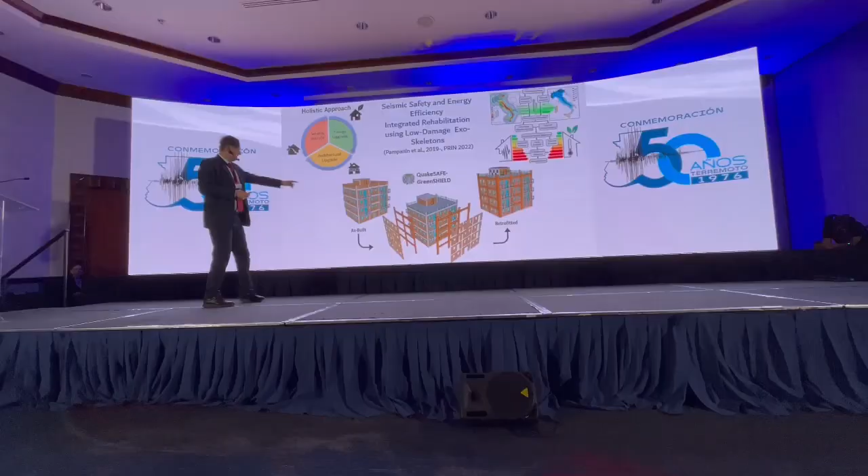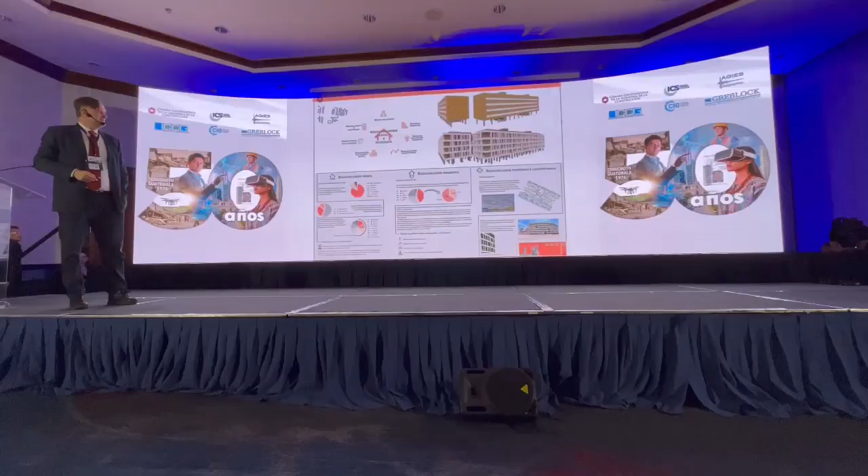And I'm showing, and I'm finishing off, sorry for the patience, an example of potential intervention. So this is the Olympic Village in Rome, 1960, and we are working on, we have been proposing, it's not going to happen, we are proposing to have one of these exoskeletons, the building before, the building after.

You see that there are no balconies, so the suggestion is, I will do seismic and energy and give you a free balcony. Who pays? Me, government. Why? It's so more convenient for all of us, so that I will come and do the whole thing. But I cannot oblige you. If you raise your hand and you want to be part of the scheme.

And these are becoming the render of the new balconies. And so now this is a school, one of our many town medieval villages. Awful school, this school is bad, needs to be demolished.

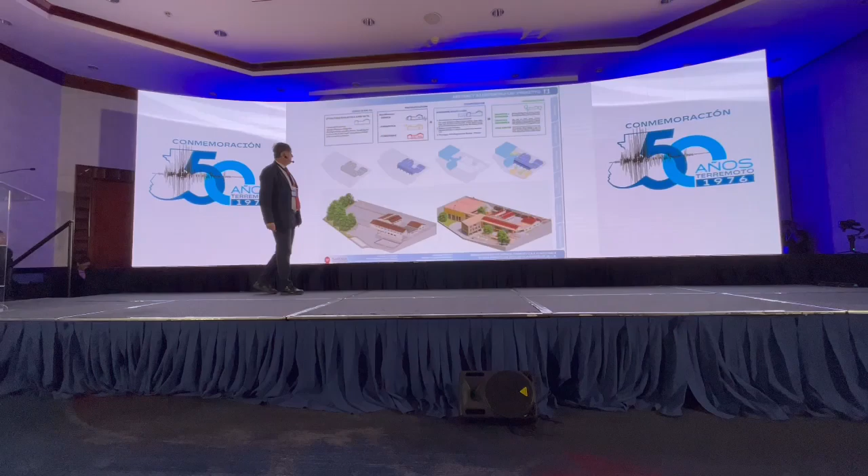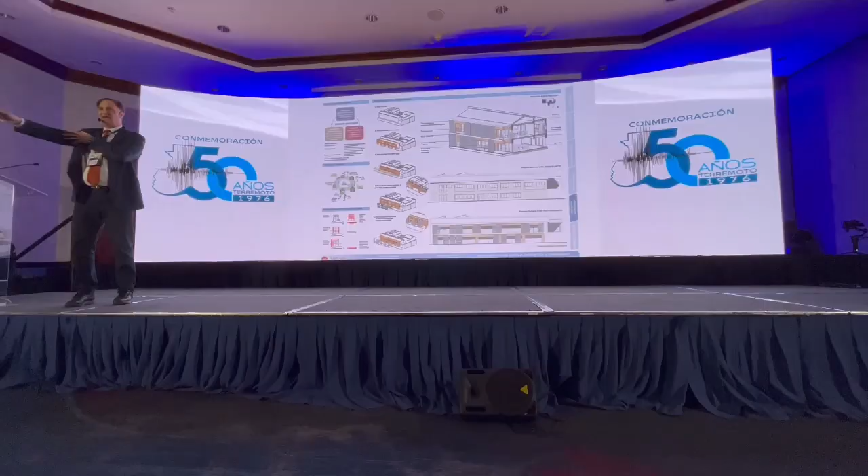But with a little bit of intervention, look at from left-hand side to right-hand side, a full regeneration of the school. You're adding a timber-based, post-tension timber-based exoskeleton, and look at what it becomes. New balcony, new loggias, new fantastic stuff.

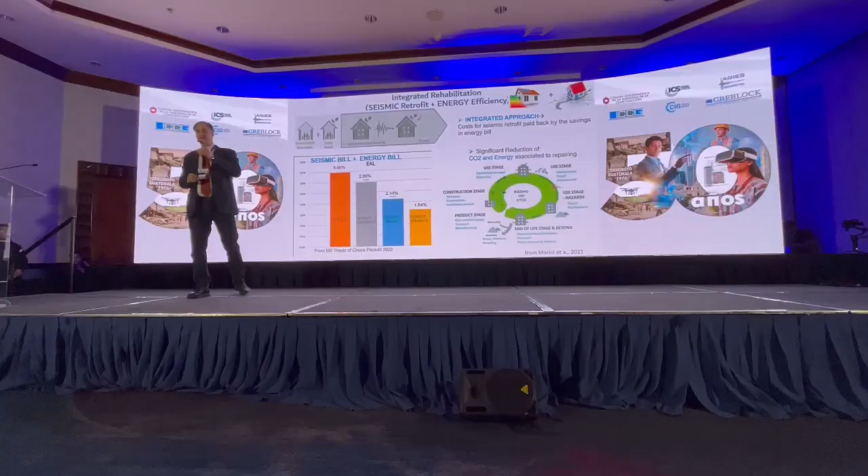I don't have time. It's a matter of bill. Seismic bill together with the energy bill. So who pays for the seismic intervention? The energy bill that you're saving. The energy bill will be reduced by the energy intervention.

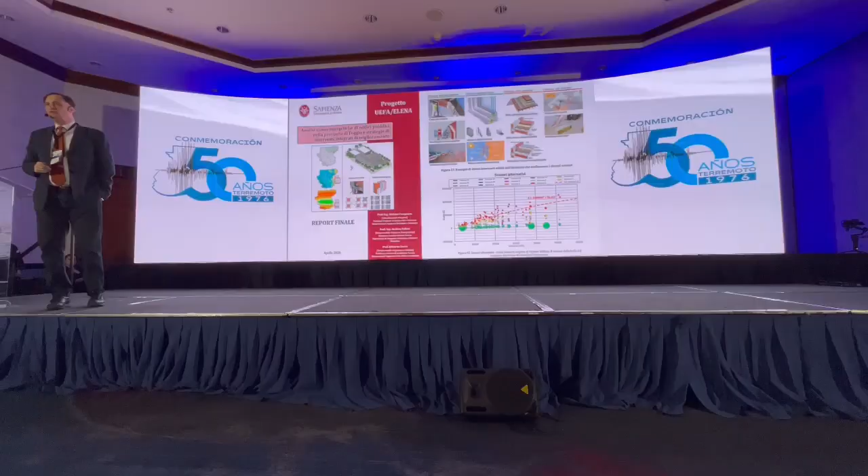It's giving you money to do everything else. And we've been applying that to 86 schools as a project feasibility in the southern part of Italy.

Okay, finishing three slides. 50 years later, you've been so patient. But now that's the point. 50 years later, we must do something. Not in Guatemala, everywhere. 50 years later in Guatemala, we urge a national plan for seismic risk reduction. I made a bit of a calculation of the expected annual loss.

Let me say it again. What is the bill that you pay? I don't, you pay, in Italy we pay more, you pay by doing nothing. The bill is thousands of victims, tens of thousands, hundreds of thousands, injuries, homeless, plus 50 to 200 million US dollars a year. So by doing nothing, you're spending a huge percentage of your gross domestic product. You didn't know. So these are the numbers. Because when the earthquake comes, it's going to take that yearly base bill.

So what is the plan? Long term, 7, 15, 30 years. I show you for... excuse me, I need to go here if it's taking. So, Italy, the investment that I was suggesting to the government is about 10 to 15 billion euros. But the point is the percentage of the GDP. So in Guatemala it will be about 0.5% of the GDP, which is something you were going to say is huge.

300 to 500 million a year? I don't have that money. Yeah, you do. You're wasting, let's say, 150 a year doing nothing. 150 a year doing nothing for 10 years, for 20 years, while if you're pushing very hard with your vaccine, your seismic vaccine, you can actually get a very big result.

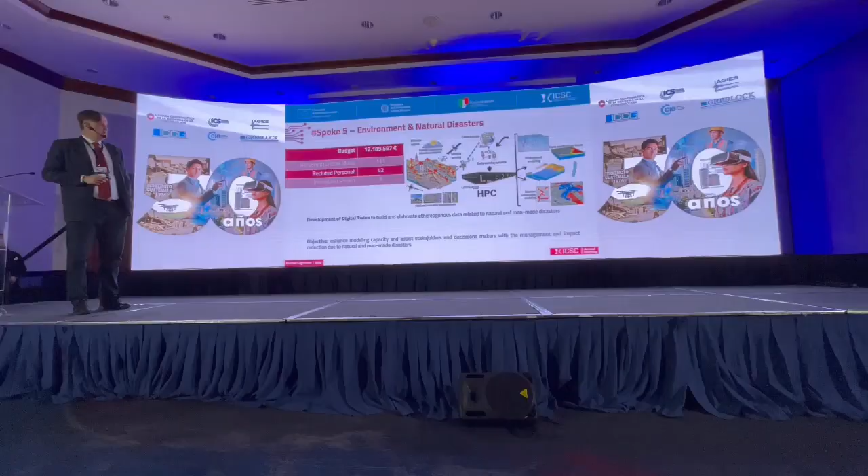We are working on a major project, 300 million euros of research, where we are doing high performance computing to look at the whole hazards in Italy. I'm working on the earthquake part, and we are trying to look at the full Italy, looking at every single building to try to do what? To try to do — I need your help.

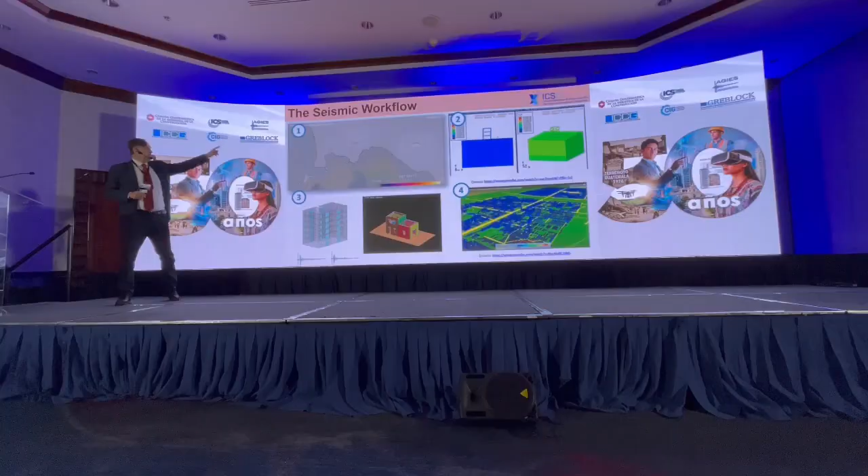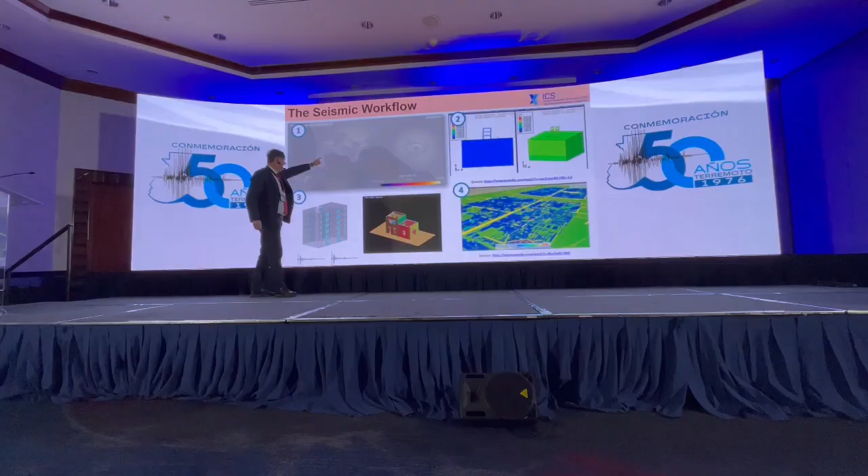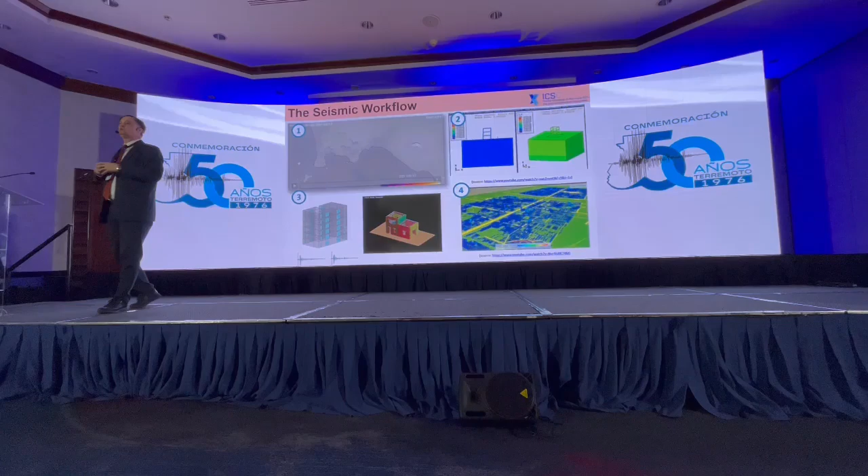You need to click. The physics-based seismic shaking of different buildings, different earthquakes. If you have to, you can click. Amplification of the soil, movement of the buildings before and after retrofitting, and at the end you're going to have the full picture. Okay, you got the point. We are trying to work on these extremely sophisticated, very powerful things. To do what?

I need to go, if you help me change the slide. There you are. If you can click on this. I don't know if it's working. Click on this, to look at different scenarios of different earthquakes in Italy and what will be the best strategy. I go ahead to finish. The best strategy to retrofit. So you can create a strategy nationwide to retrofit and make it happen.

I'm finishing off thanking thousands of people that have been working on earthquakes, on the research, in these years. So it's been quite a journey, and I wish that we continue this journey. It's about international collaboration and sharing, so I really believe that these are situations where by getting suggestions or ideas or models, you can make it happen.